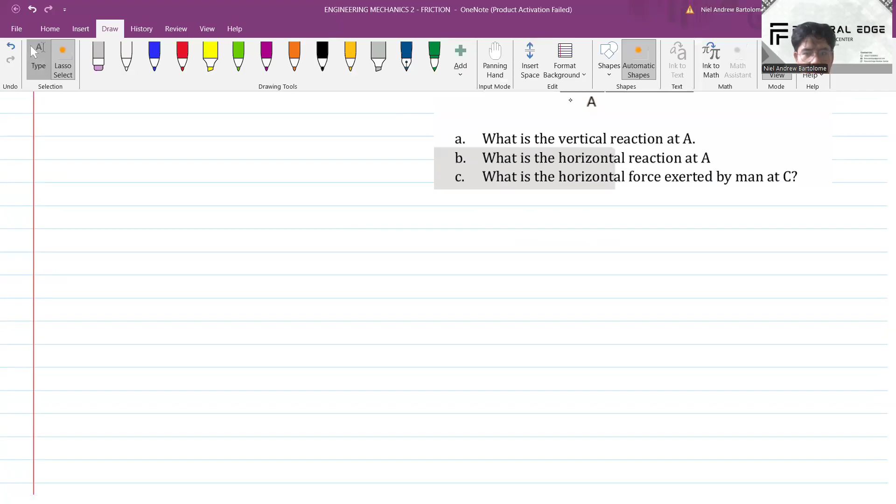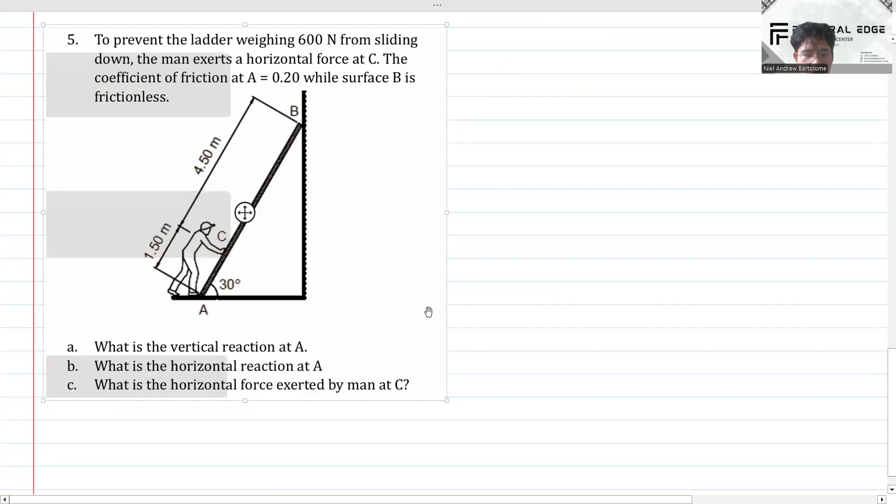So, sample problem 1 muna tayo. Problem 5. To prevent the ladder weighing 600 newtons from sliding down, the man exerts a horizontal force at C.

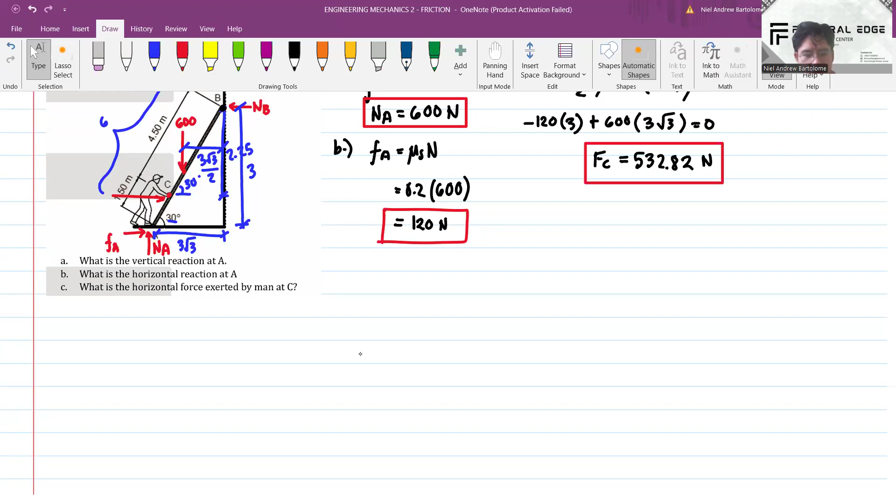So, problem 6. The crate has a mass of 50 kilograms. Mu S natin, 0.25. Mu K natin is 0.20. Then, titingnan natin mayroon tayong crate dito. Then, meron tayong applied na force P. Right? Then, yung surface natin is inclined 30 degrees from the horizontal. Then, ano yung mga hinahanap? Letter A, determine the minimum horizontal force P required to hold the crate from sliding down the plane. Then, B, determine the minimum force P required to push the crate up the plane. Then C, determine the minimum force P required to keep it moving up the plane.

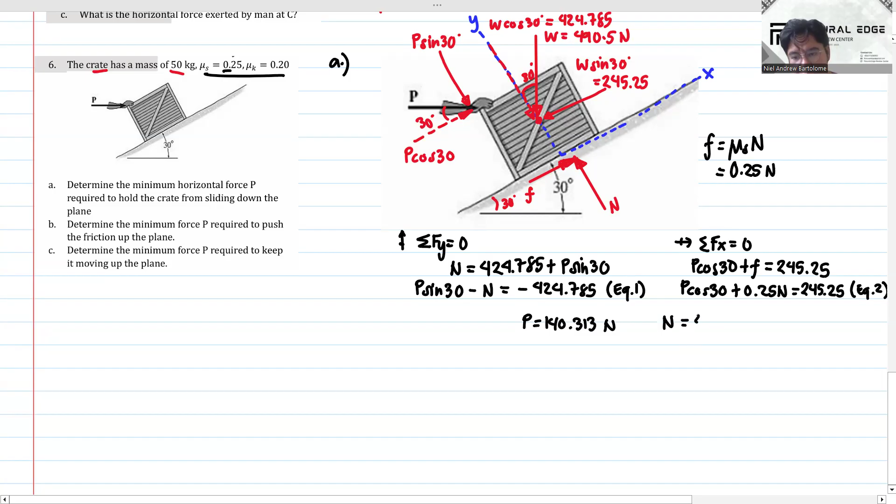So, we have sine 30 sa A. Sa B naman, negative 1. Then, negative 424.785 sa C. Then, sa equation 2 naman, cosine 30 sa A, 0.25 sa B, then sa C natin is 245.25. Then, solve for the P and N. So, yung P natin, we have 140.313 Newton. Then, for the N naman, we have 994.941. So, yung hinanap dito is yung minimum horizontal force P. So, nakuha na natin. Okay?

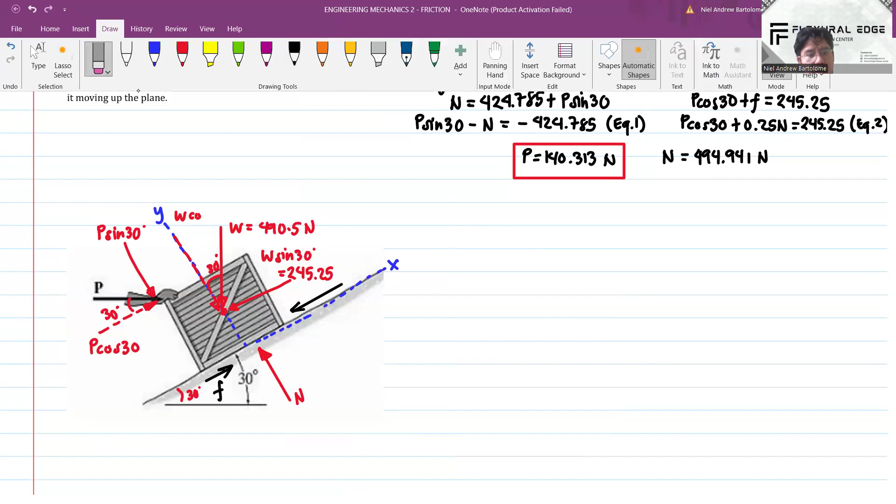So, we have F is equal to mu s times N pa din. Okay? So, gawa tayo ng equation. Fy equals 0. So, part B ito. Fy, equate natin yung pababa. So, we have W cosine, ilan ba to? 490.5 cosine 30. So, we have 424.785. Okay? So, ayan.

So, ngayon, Fy natin, yung pababa, 424.785 plus P sine 30 is equal to N. So, isolate natin yung constant. So, ito, equation 1 lang din.

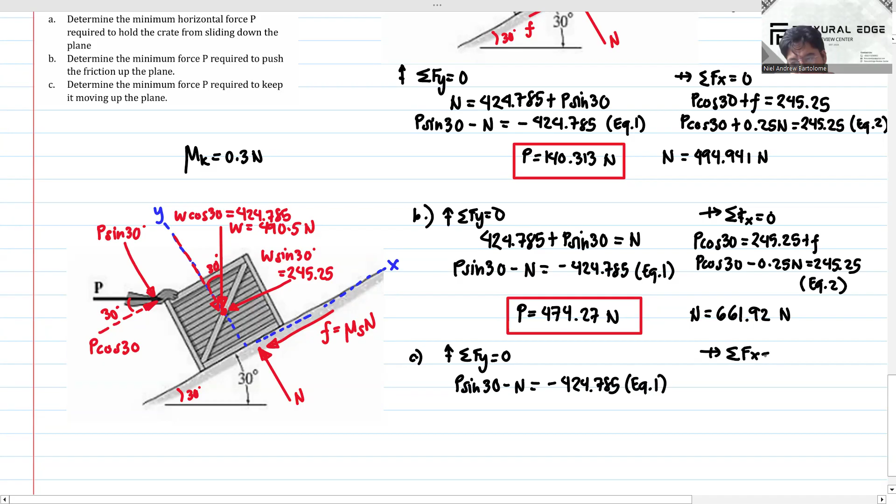Then for the equation 2, instead na 0.25, 0.30 na. Okay, 0.30 ba? Check na natin. 0.20 pala, sorry. So 0.20 yung mu k natin. So instead of 0.25, 0.2 na.

So we have P cosine 30 minus 0.2 N is equal to 245.25. Ito yung equation 2 natin. Then solve. So we have P is equal to ilan?

0.5, -1. So yung P natin, we have 431.07. Then yung N natin, that is equal to ilan? 640.32. Okay, so yung answer natin dyan is ito.

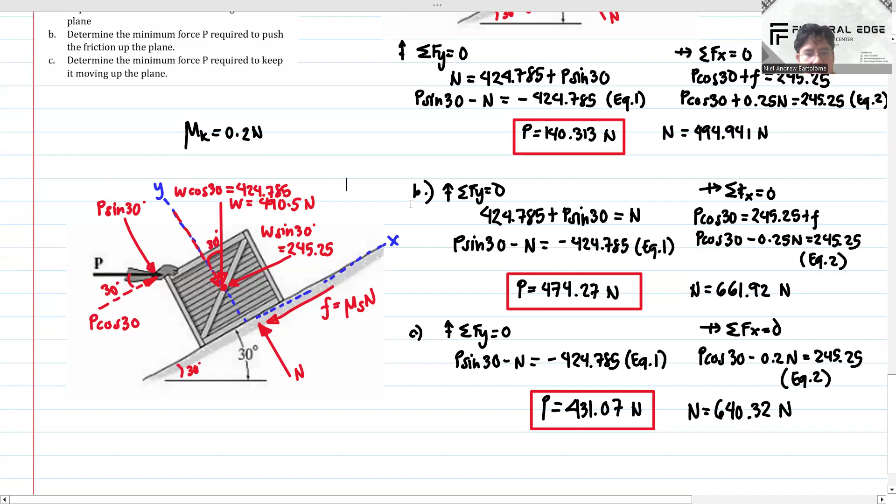Okay, so ayan, kuha ba guys? So ito, picturean nyo, then yung sa baba. Okay na, ito naman sa baba. Okay na, then problem 3 tayo.

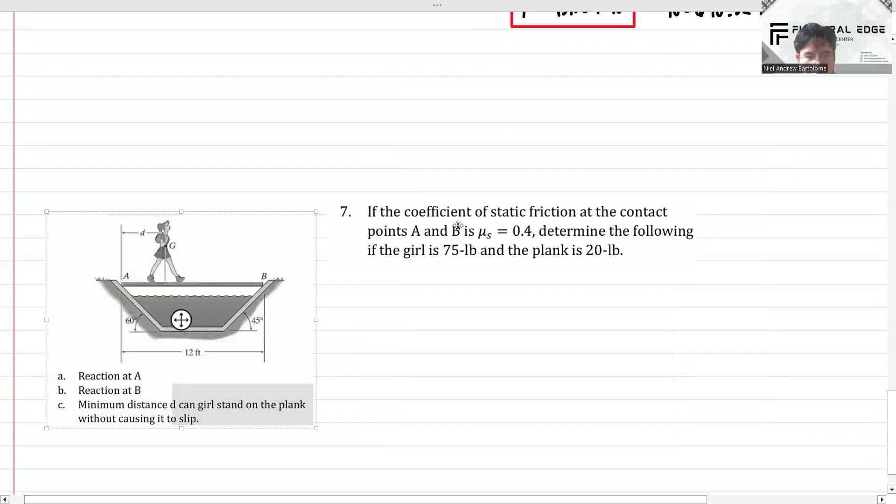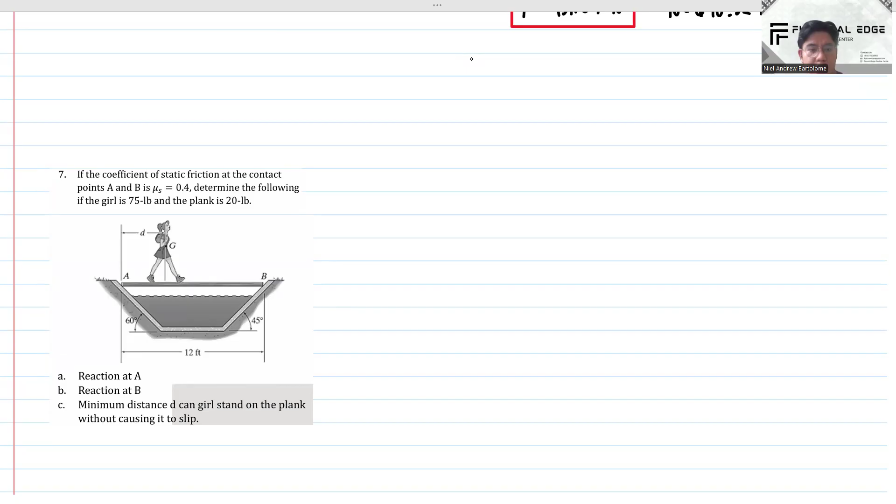Ayan, problem 7 tayo. So if the coefficient of static friction at the contact points A and B, so meron tayong points A and B dito, is mu s equal to 0.4. Determine the following if the girl is 75 pounds and the plank is 20 pounds. So A is the reaction at A.

Hanapin natin yung reaction at A or the RA. Okay, then next, we have the reaction at B, RB. Then minimum distance D can the girl stand on the plank without causing it to slip. Okay, so ano yung distance D natin? Okay pa, so paano natin i-solve yung mga unknowns natin?

So una, analyze natin yung problem. So meron tayong given, weight ng girl that is equal to, bang kulay natin? Blue. So we have 75 pounds. Then yung weight ng plank natin, which is nasa gitna, that is equal to 20 pounds. Ano pa ba? So meron tayong mu s or coefficient of static friction that is equal to 0.4.

Tama? So yung mu s natin, that is equal to 0.4. Then analyze na natin tong buong figure na to. Okay? So di natin alam, di ba? Di natin alam kung ano yung magsa-slide down dyan and magsa-slide up, di ba?

So halimbawa, ito yung plank na inaapakan nung girl, di ba? So ito yung point A. Kikita nyo, ito yung point A. Then ito yung point B. Okay? So habang nagwo-walk or naglalakad yung babae to the right, so pwedeng gumanon yung plank or pwedeng gumanon. Okay? So kapag gumanon, itong point A yung magsa-slide down, then ito yung magsa-slide up. Okay? Then kapag gumanon, yung point A yung magsa-slide up, then ito yung magsa-slide down.

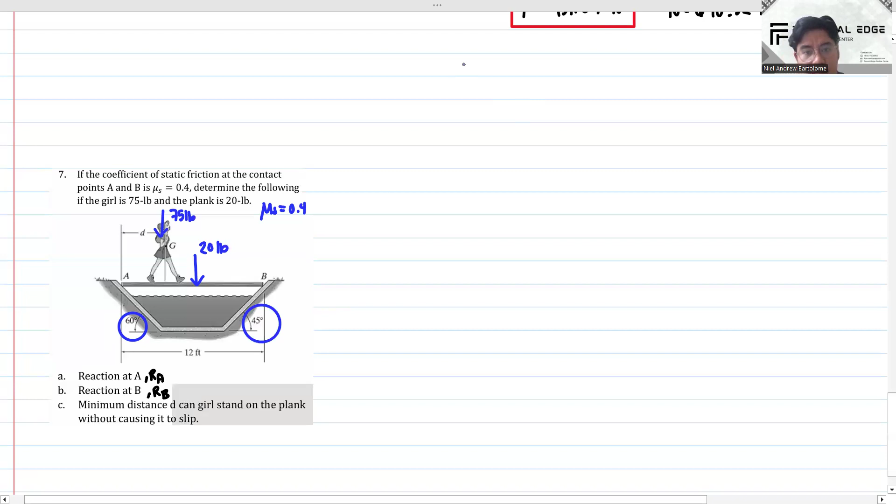Okay, then yung sa point B na, yung magsa-slide up. So kapag magsa-slide down ito, okay, so kapag mag-slide down itong point A, paano ba to? So ganito yung direction niya. So therefore, yung force natin dyan, frictional force, is pa ganito, pataas, okay? Then since itong point B naman yung mag-slide up, okay? Ito yung F natin. Okay? So ayan.

Na-distinguish na natin yung direction ng frictional force. Assumption pa lang naman yan, ano? So ayan. So ito, pag ganito yung FA natin, then yung FB naman natin, is pag ganito. Okay? Then ano pa ba? Yung mga normal force natin dito sa point A, is ito. Then ito pa, isa.

Okay na? So ayan, ano pa yung next? So paano natin siya masasolve? Yung mga reaction at A, reaction at B. Unknown yung NA, unknown yung FA. So paano natin makuha yung reaction at A? Unknown din yung NB, unknown din yung FB. So paano natin makuha yung reaction at B?

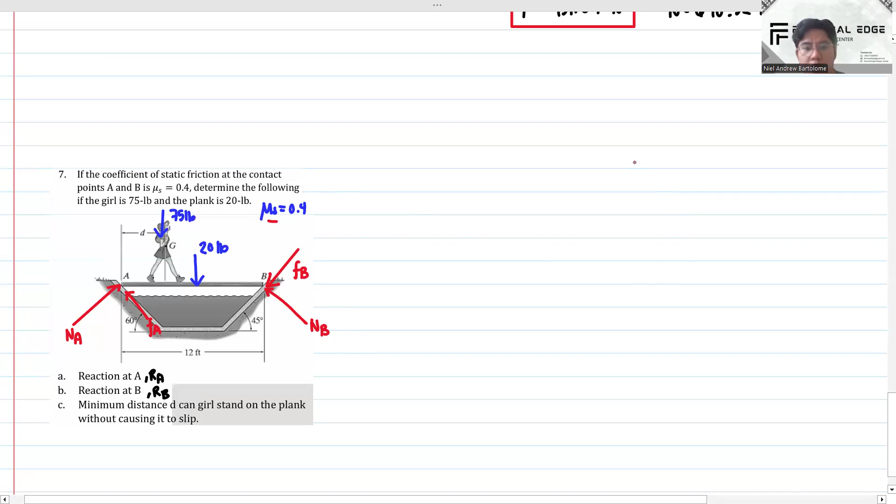So next, gawin natin, check natin itong mu s na to. Okay, so balikan natin yung diniscuss natin. Wait lang, ipan ko lang sa taas. So kung titingnan natin dito, ano? Saan na yun? Ito. Okay? So kung titingnan natin, yung R, di ba? Saan yun? Ito.

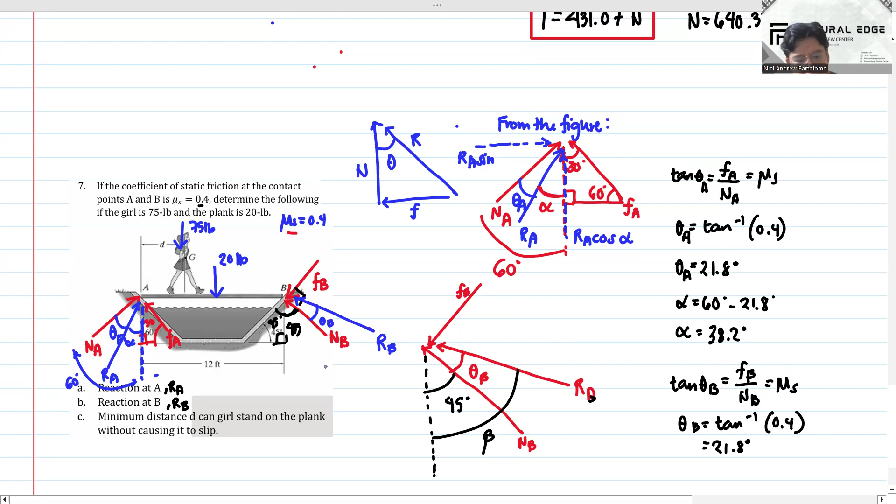Plus natin sa 45. So we have beta is equal to 45 plus 21.8, or yung alpha B natin, that is equal to ilan? So we have 66.8 degrees.

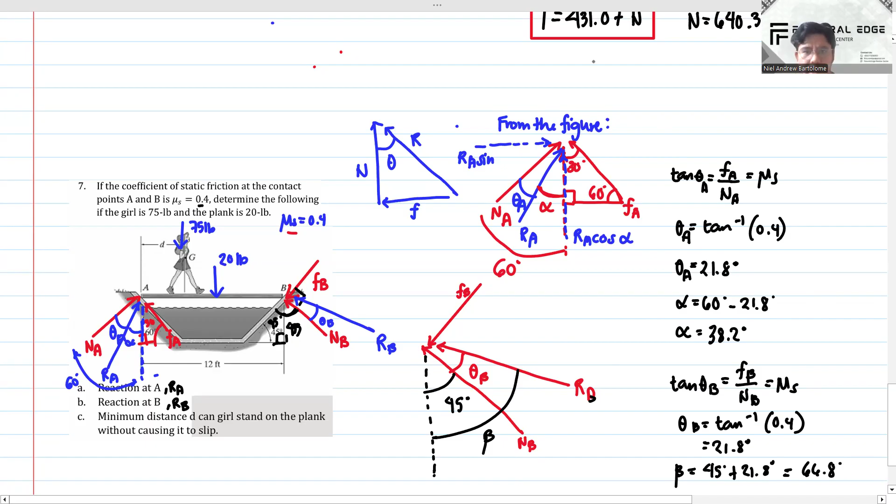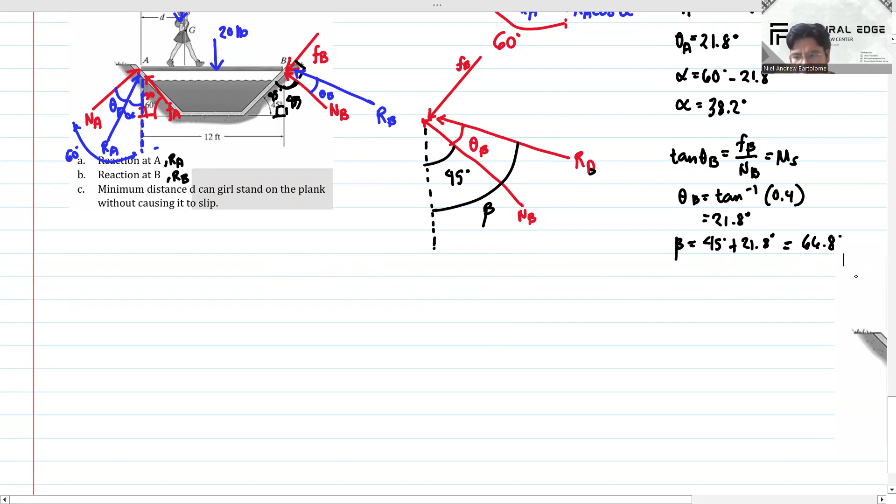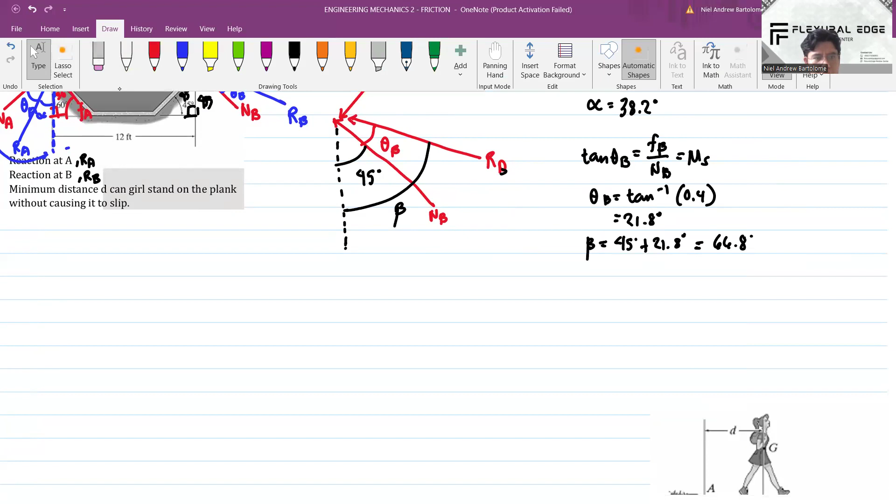Okay, i-redraw natin yung figure para mas ma-visualize natin ng maayos. Wait lang, copy ko lang yung figure nung girl. Sana yun? Hindi siya ma-slide, wait lang. Pa rin ba? Yun. Tapos ayusin natin. Pwede na siguro yan. Baba lang natin yung pan.

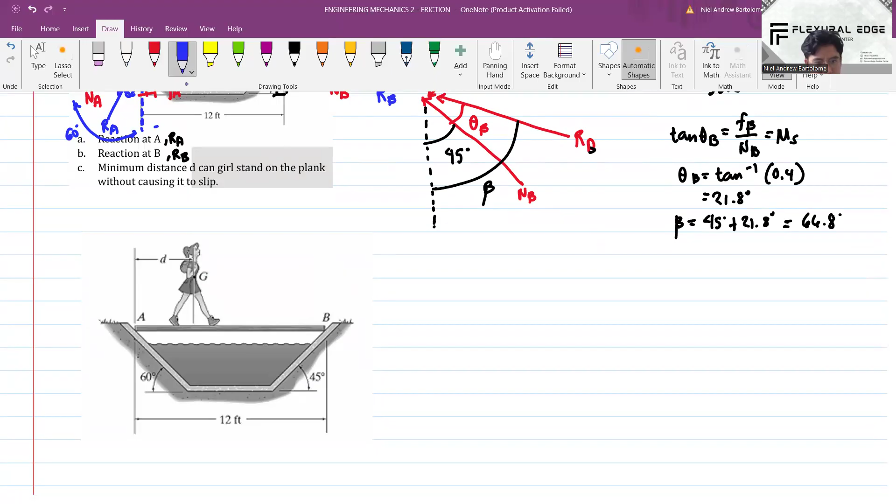75, 20. So we have 75 pounds, then ito 20. Then yung RA natin, nandito na, RA. Then yung theta natin, tawag dito alpha, ito yung alpha natin.

So resolve natin into components. We have RA cosine, yung alpha natin, that is equal to 38.2. Then yung x component, we have RA sine 38.2. Baka may magtanong sa inyo kung saan galing yung alpha, na-compute na natin kanina, so mag-analyze tayo.

Ano pa ba? Sa point B naman, so ito yung RB natin. Nandito yung theta B. Ito kasi yung NB natin, tapos ito yung FB. So ito yung theta B, 45 degrees to, kasi ito 45. Ito perpendicular, so therefore ito that is equal to 66.8 degrees.

Burahin natin yung mga unnecessary na. Okay, so ito 66.8. Therefore resolve natin yung RB into Y and X component. Ito RB cosine 66.8, then ito naman...

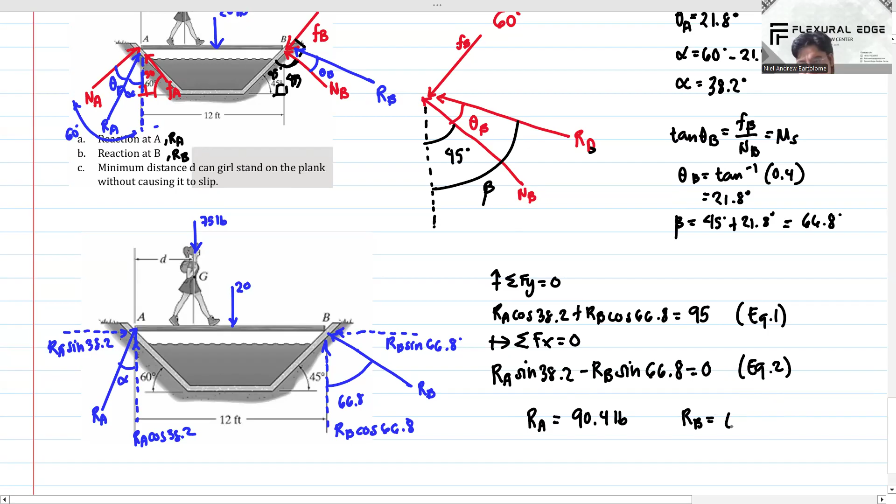Reaction at A natin, that is equal to 90.4. And yung reaction at B natin, that is equal to 60.82 pounds. Okay, so nakuha na natin yung part A and B. Ito yung answer natin.

Part A, ito naman yung part B. Next, ano pa ba? Sa part C naman, yung hinahanap is yung minimum distance D.

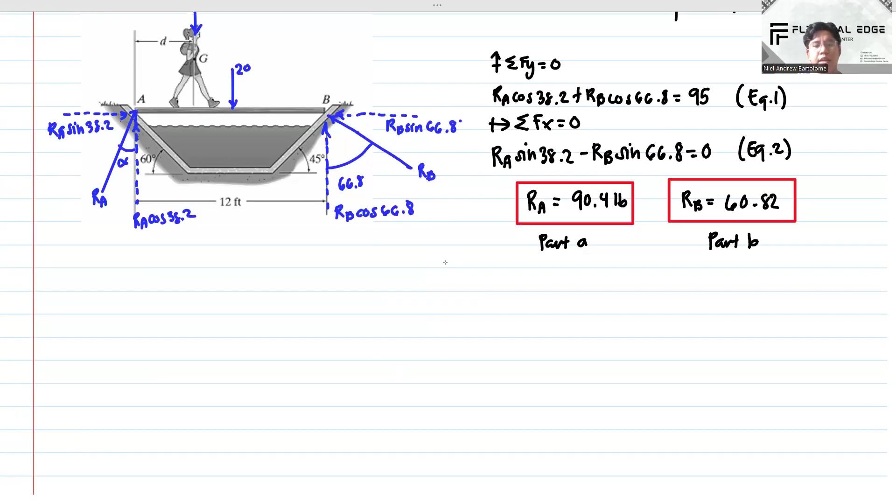Can girls stand on the plank without causing it to slip? So yung minimum distance daw, which is D, na pwedeng tayuan ng babae na hindi nagsislip yung plank natin. Paano natin makuha yung distance D? So by means of moment.

Meron tayo dito ang mga moment arm. Yung moment arm ng 75, so ito magmo-moment tayo about A para makuha natin yung D. Kasi obvious naman, di ba, dito sa figure. Pwede na natin makuha yung D using moment.

Alright, then itong 20, yung moment arm niya, since nasa gitna yan, so that is equal to 6 feet, kalahati nitong 12. Then yung moment naman ng B, meron tayong dalawang components. Hindi natin makakompute yung moment arm ng mismong reaction at B kasi mahirap yan.

So resolve natin yung components, compute natin yung moment arm niya per component. Yung component ng B about y-axis, yung moment arm niya is 12. Pero dito, since dadaan naman siya dito sa AB, plank AB, wala ito moment arm. So mag-moment tayo about A is equal to 0.

Clockwise is positive, so unahin natin yung 75, magkako siya ng clockwise times moment arm na D. Then yung 20 pound natin, yung moment arm niya is 6 feet. Then next yung vertical component ng B natin.

So we have RB cosine 66.8, nakuha na natin yung mga values yan. Then yung moment arm niya is 12. That is equal to 0.

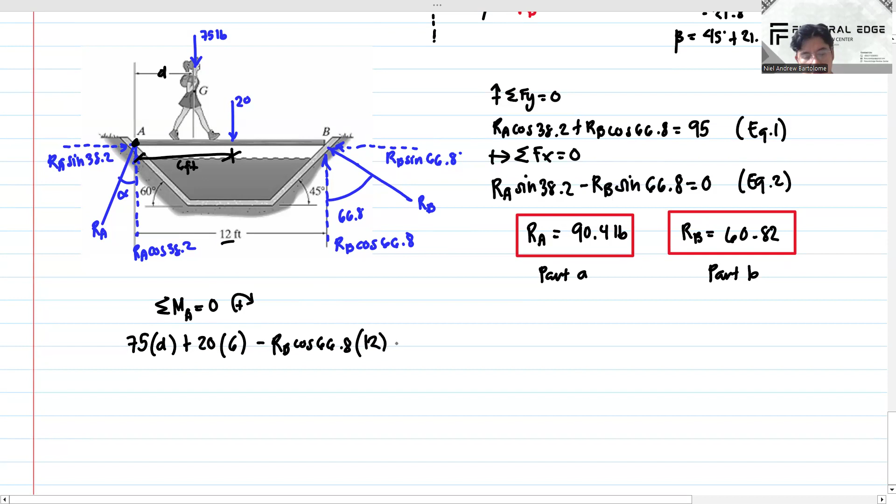Then solve for D, ilan ba yun? So yung RB natin, 60.82 times cosine 66.8 times 12 minus 20 times 6 divided by 75. So we have 2.23 feet, and yan yung answer natin sa part C.

Okay, so yan po. Next, problem ano tayo? Problem 4?

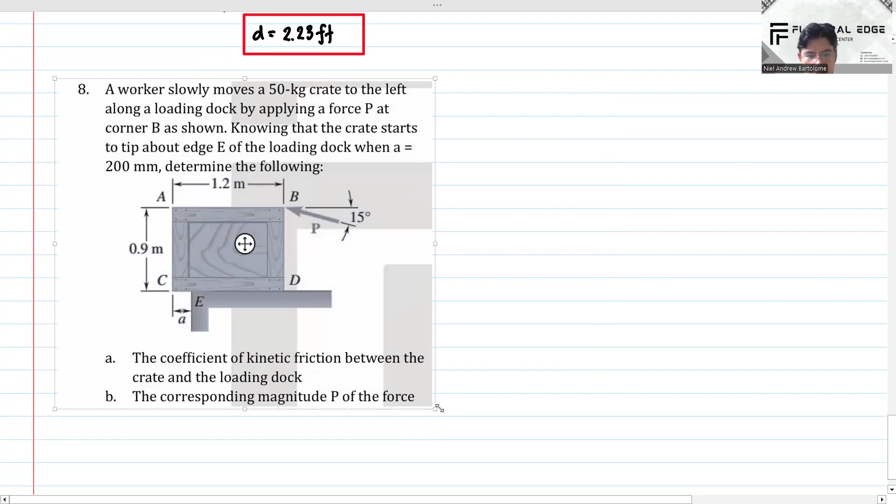So yan, problem 8. Meron daw worker which slowly moves a 50 kilogram crate to the left along a loading dock by applying a force P at corner B as shown. And knowing that the crate starts to tip about edge E of the loading dock when A is equal to 200 mm, determine the following: A, the coefficient of kinetic friction between the crate and the loading dock, and B, the corresponding magnitude P of the force. Okay? So, paano natin to isosolve?

So, para ma-solve natin yan, analyze natin to figure. So, kung titingnan natin, dito sa figure na to, meron tayong A is equal to 0.2 meters, okay? So, therefore, yung matitira dito, that is equal to 0.9. Then, yung weight natin, nandito yan. So, yung weight, that is equal to 50 times 9.81. So, we have 490.5. Okay? So, yung natira dito sa taas, we have 1.2 minus 0.2. So, we have 1.0. Okay? So, para makuha natin yung kinetic friction and magnitude P, okay?

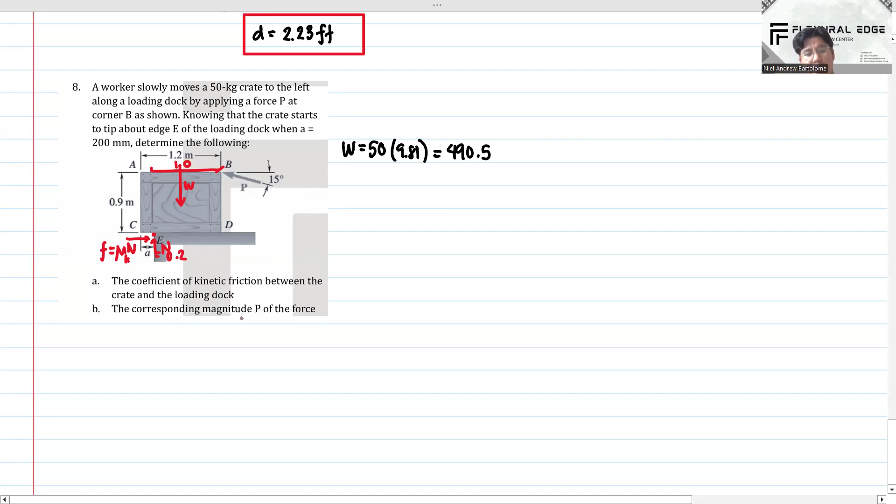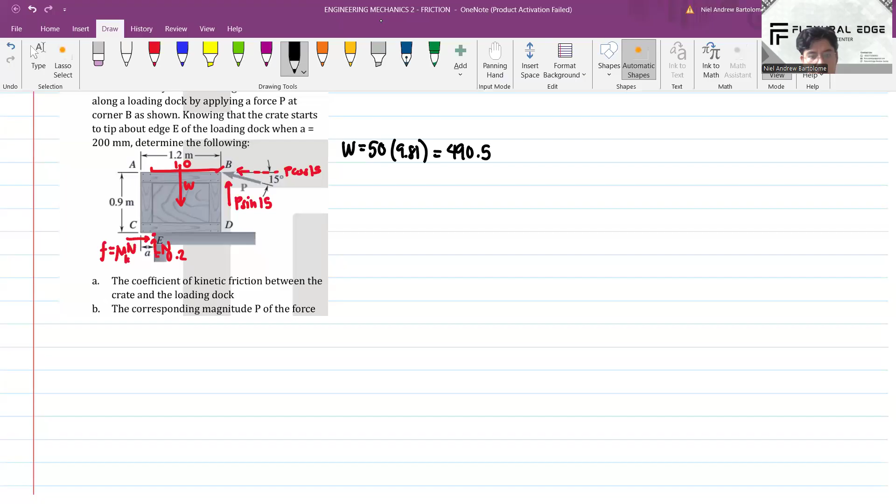So, ito, resolve natin into components. P cosine 15. Then, ito, P sine 15. So, para makuha natin yung P, kasi hindi pa natin makuha yung part A, pwede tayong mag-reverse engineering, kunin natin yung part B muna. So, para makuha natin yung P, eliminate natin yung F saka N dito sa baba. So, para ma-eliminate, mag-moment tayo about E. So, we have part B, summation of moments about E is equal to 0.

Clockwise is positive. Unahin natin yung W. So, yung W, that is equal to 490.5. So, magkakapa siya ng clockwise. Then, yung moment arm niya, supposedly 0.6 yan, no? Pero bawasan natin ng 0.2. So, ito 0.4, ito 0.6, then ito 0.2, A yan. So we have 0.4. Then, next, we have P sine 15. So, magkaka siya ng counterclockwise. Times its moment arm, we have 0.4 plus 0.6, we have 1. Then, we have P cosine 15, magkaka siya ng counterclockwise. Times its moment arm, we have 0.9.

Galing dito sa point E, ano? So, we have 0.9. Then, set natin equal to 0. Then, solve for P. So, we have 173.91. Okay? Nakuha na natin yung P. So, next, pwede tayo mag-summation of forces vertical is equal to 0. Okay? So, ito na yung answer natin sa part B.

Paano ba to? Part A tayo. So, we have weight, 490.5 is equal to N, yung paitaas naman, plus P sine 15. Then, solve for N. So, yung N po natin, that is equal to 445.489 newtons.

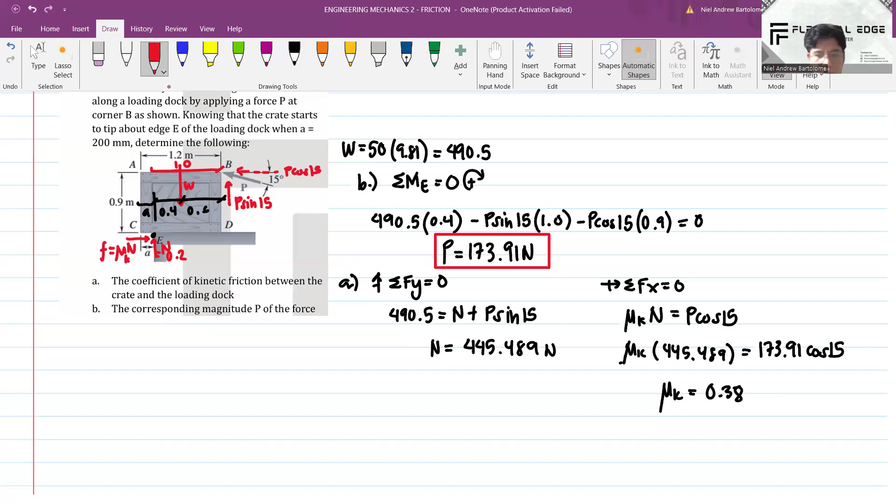Ayusin natin ito. So, yan yung answer natin sa part A. Okay? So, madali lang siya. Okay, ito yung problem 8 natin.

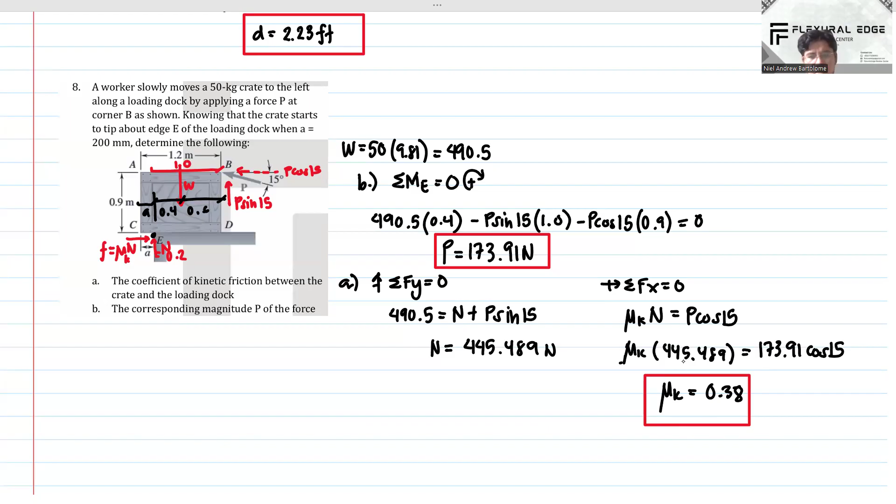Next naman, problem 9.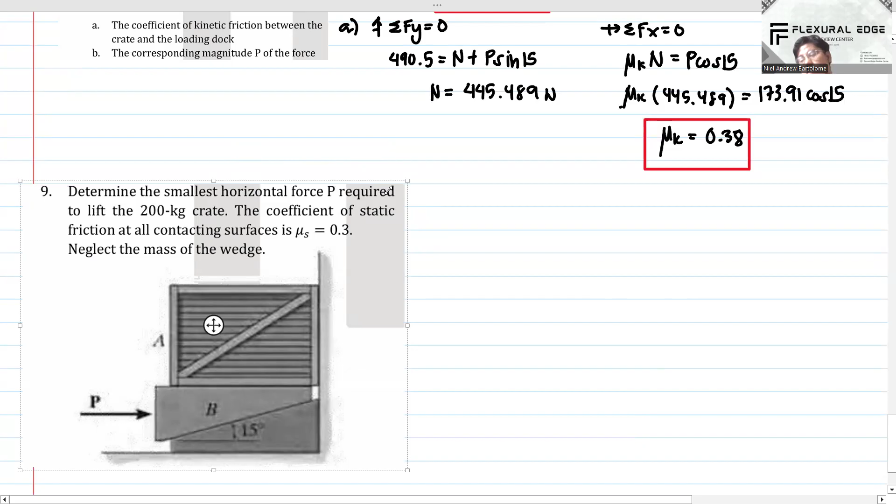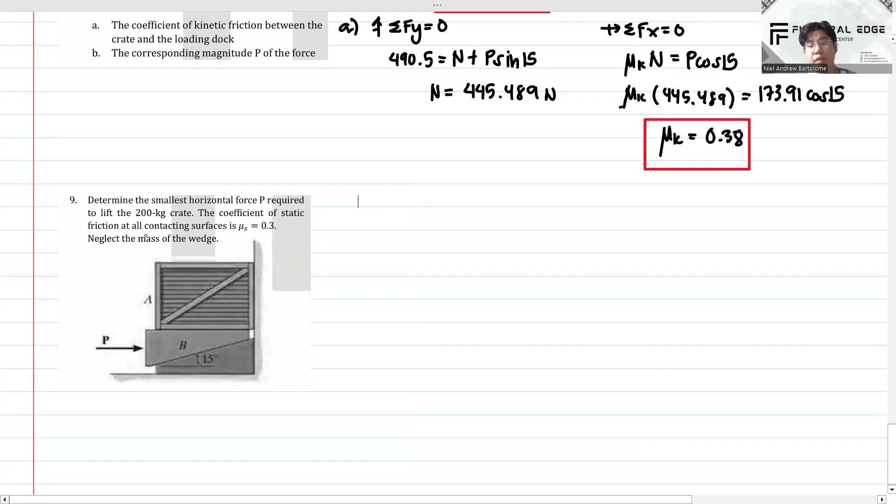Taas natin. So, sa problem 9, determine the smallest horizontal force P required to lift the 200 kilogram crate. The coefficient of static friction at all contacting surfaces is mu s is equal to 0.3. So, yung coefficient of static friction natin, sa lahat ng contacting surfaces, that is equal to mu s 0.3. Then neglect the mass of the wedge. So solve for smallest horizontal force P.

So paano ba yan? So analyze natin. Meron tayong crate dito, then merong wedge sa ilalim, wedge B. So kukunin natin itong P. So paano natin makukuha yan? So una, analyze muna natin yung crate na to, 200 kilograms, yung nakabox na yan. So, ito yung box natin, yung crate. Then, meron tayong mga forces. W, that is equal to 200 times 9.81. That is equal to ilan?